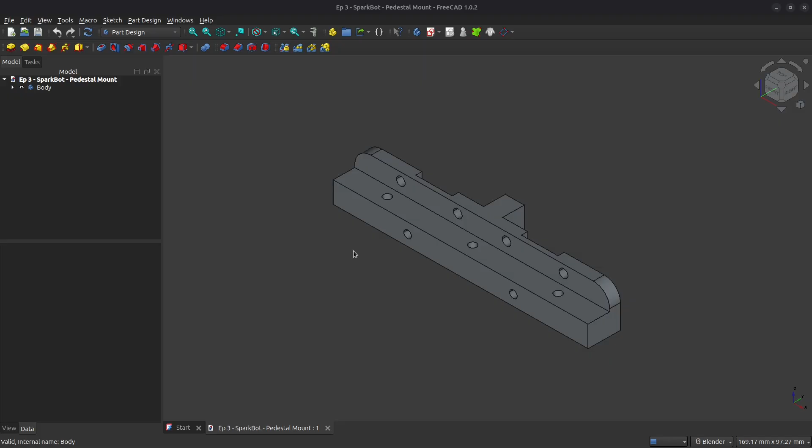With our mobility base and accessory deck locked in, it's time to tackle our odometry and our structural load paths. In this episode, we're engineering the pedestal mount. This pedestal is designed to rigidly secure our IR tachometers to track wheel rotation. This component also acts as a structural node. It anchors the vertical rail that will support the overhanging weight of our battery box. Design, engineer, deploy. Let's get into the CAD.

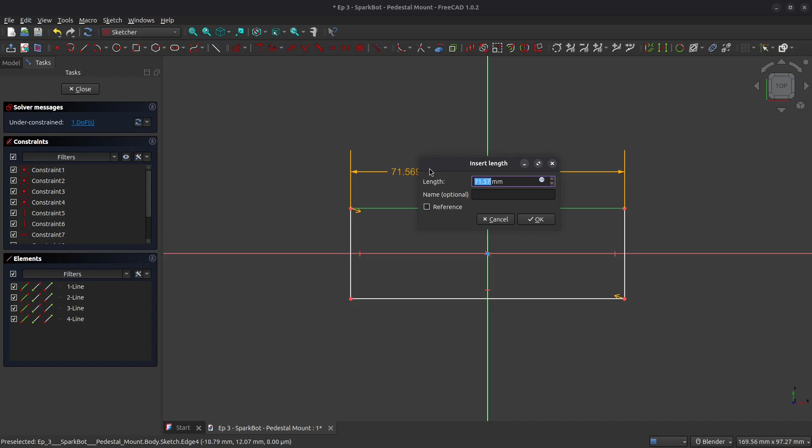Begin by creating a new body and a new sketch on the XY plane. We're going to grab the rectangle tool and create a rectangle that's symmetric around the origin. We're going to set the length of this to 94 millimeters and its vertical length is going to be 12 millimeters. Now we need 3 holes that we'll use for mounting this pedestal to our mobility base.

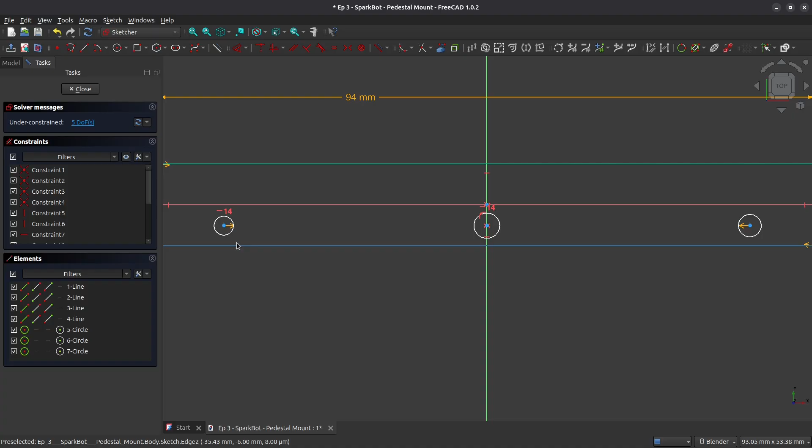So we want to make sure that we're really careful and not let the edge of these holes touch the x-axis because FreeCAD will try to constrain it there as a tangent. We're going to make sure that these 2 outer holes are symmetric around the y-axis, and then make sure that these holes are also collinear with that central hole. All right, so let's set the diameter of all 3 of these holes so that they're equal, and then we will set the overall diameter to the minor diameter of our PT screws, which is 2.8 millimeters.

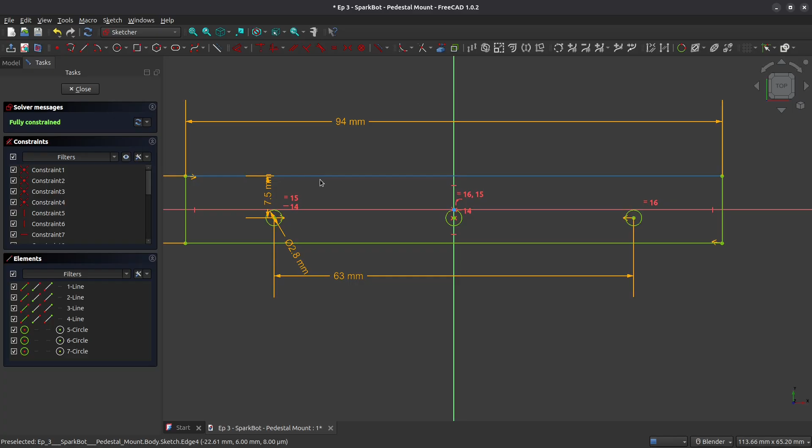Okay, so let's set the distance between these 2 outer holes. That's going to be 63 millimeters, and we're going to create an offset from the top of our rectangle of 7.5 millimeters. All right, with that, our shape is fully constrained and we can close out of this. And we're going to pad this out to 8 millimeters.

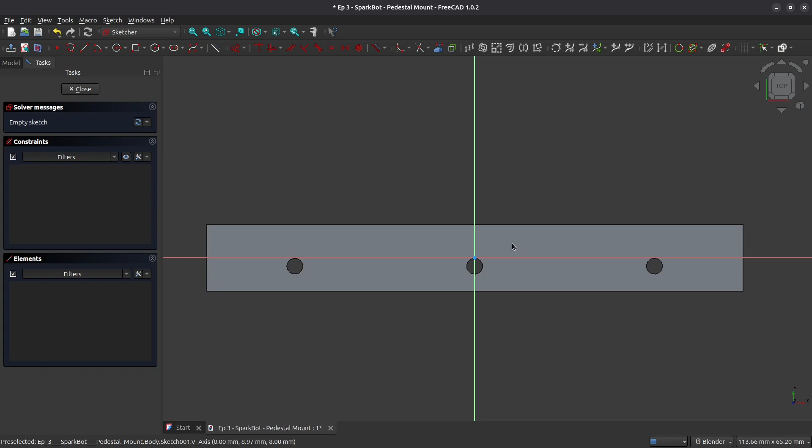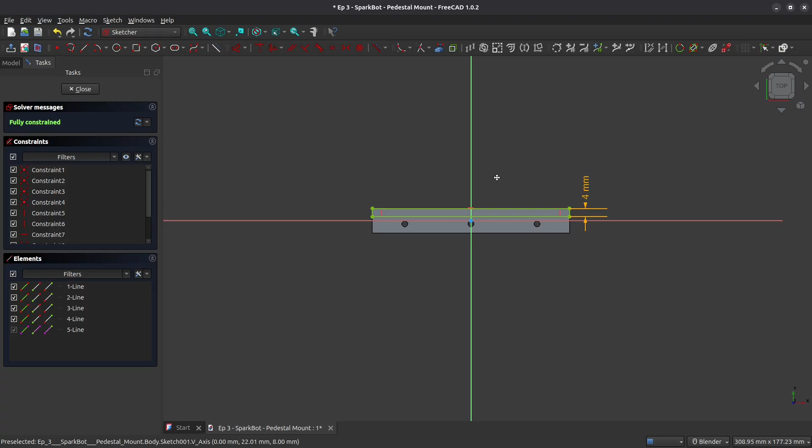All right, we need to create a shoulder on the top of this block. It will be used for securing the IR tachometers. So we're just going to reference the top edge of this block, and using the rectangle tool, we'll create a rectangle. We need to make sure that the edge is coincident in both corners, and we'll set the width of this shoulder feature to 4 millimeters. So with that, our shape is fully constrained. We can close that, and we're going to pad this out to 7 millimeters.

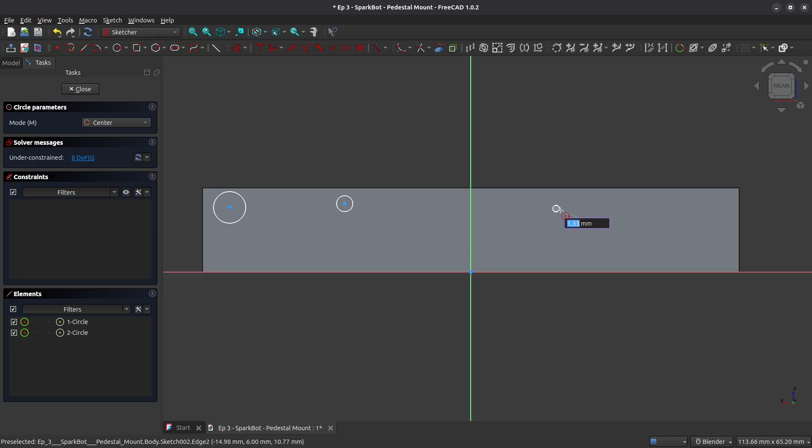Now that we've got that done, we're going to look at the back of this shape and add 2 sets of holes. These will hold the IR tachometers onto our pedestal mount. So create 4 holes, and make sure that the outer 2 holes are symmetric around the y-axis. The inner 2 holes will be symmetric around the y-axis, and then we'll make sure that these 2 sets of holes are collinear with each other, so they should move as a set. Let's make sure that the diameters of all 4 of these holes are equal. And we will set the diameter to 3.2 millimeters.

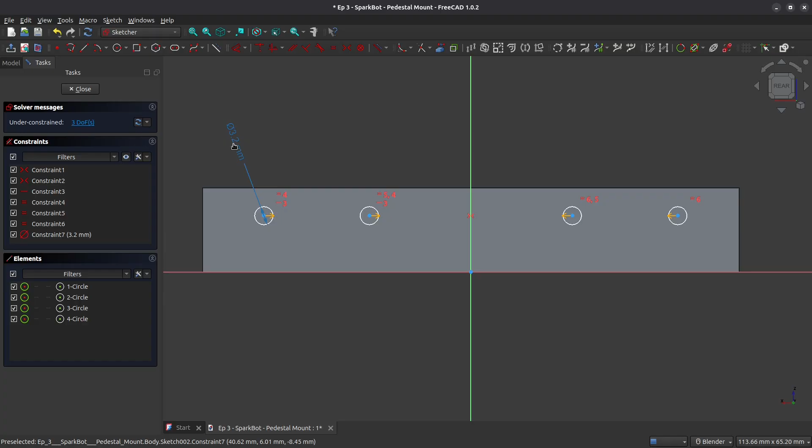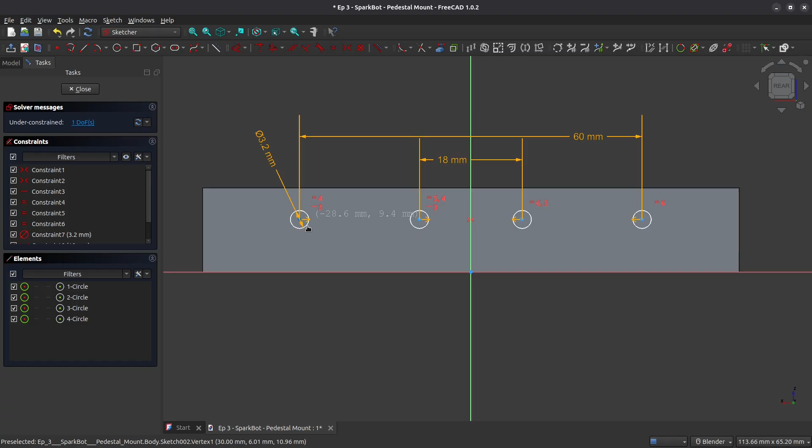We're using 3 millimeter bolts to hold the tachometers onto the pedestal, so we need to leave a little bit of room to have some clearance for those bolts. All right, so let's set the distance between these 2 inside holes to 18 millimeters, and the distance between the 2 outside holes to 60 millimeters. So there's our holes. The last thing we need to do is set their location in relation to the top of our pedestal here. So let's set that distance to 3 millimeters.

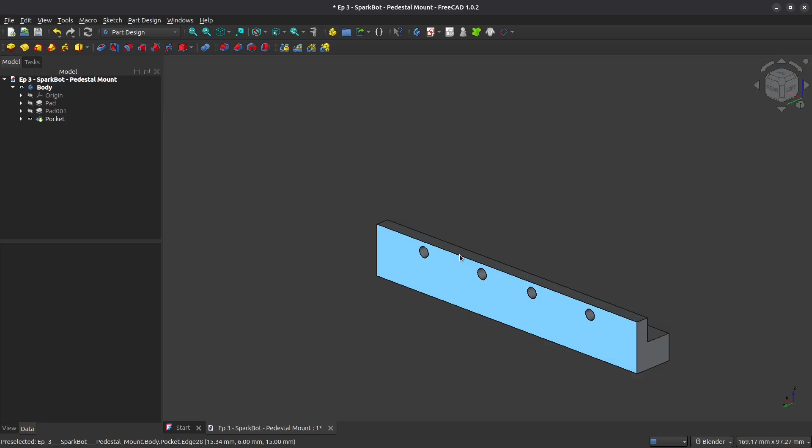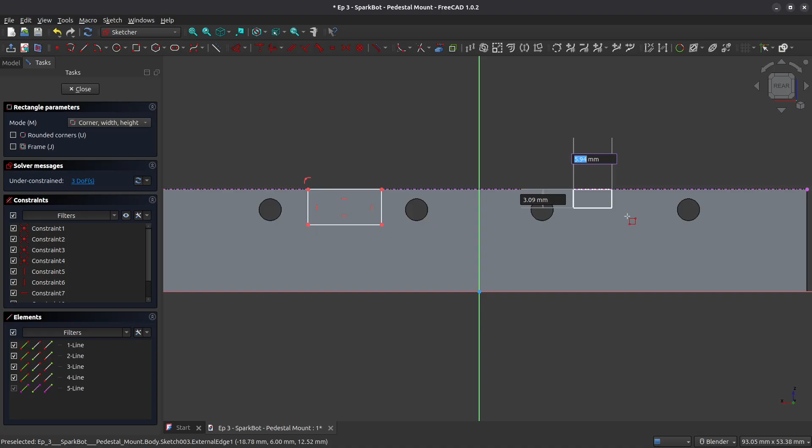And now we can see that our holes are fully constrained, and we can close out of the Sketcher workbench, and we're going to pocket those through. And 5 is greater than the 4 millimeter thickness of our shoulder, so we're good. And now we're going to create some clearance pockets on the back of our pedestal mount. The IR tachometers have through-hole components, and the ends of the pins protrude past the back of the circuit board. So we have to clear away some of the material here in order to not put tension on the circuit board of the IR tachometers when they're being secured.

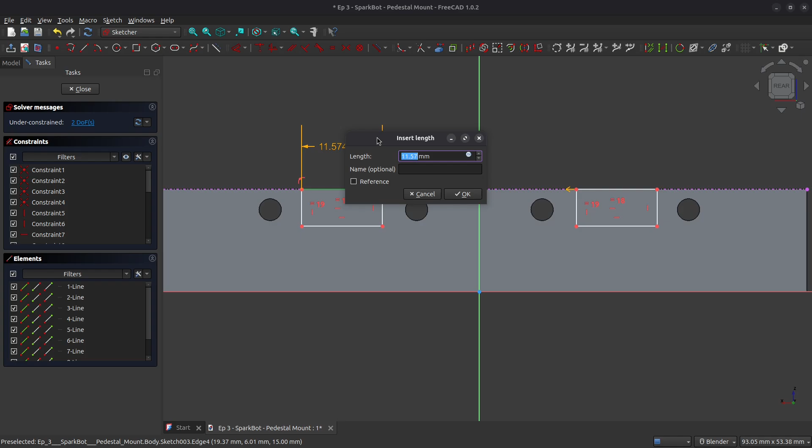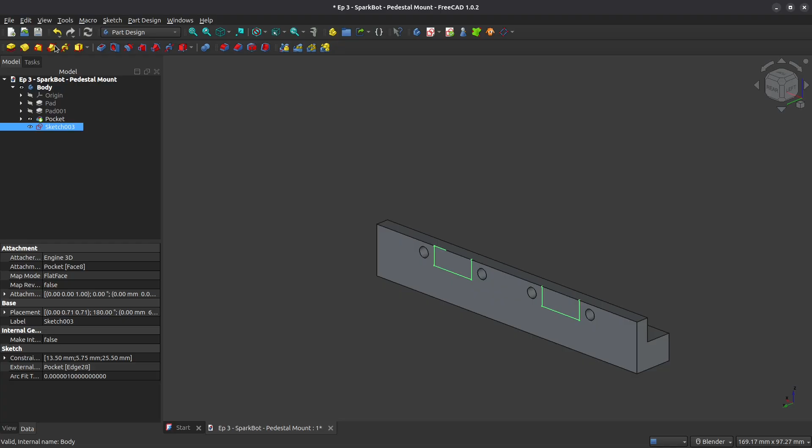So let's set the horizontal length of both pockets so they're equal. We'll do the same thing with the vertical length, and make it so that these are symmetric with respect to the y-axis. So let's set their horizontal length to 13.5 millimeters. Their vertical length is 5.75 millimeters. And let's set the distance between them to 25.5 millimeters. All right, so with that, those clearance pockets are fully constrained, and we're going to set the pocket depth to 2.3 millimeters.

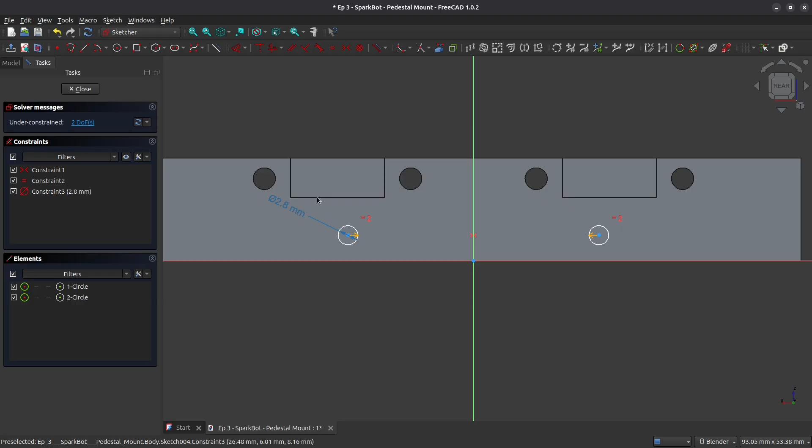Next, we're going to add 2 mounting holes to this pedestal mount. This is where the vertical rail that we construct in the next episode will be connected. And this vertical rail will support the overhanging battery box. As before, we need to make sure the diameters of both of these holes are identical. And we're going to set these to the minor diameter of the PT screws. That's how we're going to secure the vertical frame rail to the pedestal mount.

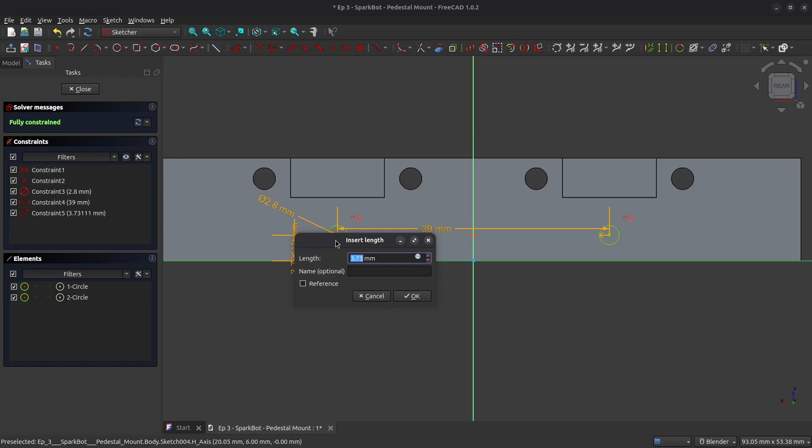And let's set the distance between these holes to 39 millimeters. And we're going to set their offset from the bottom of the pedestal at 4 millimeters. All right, so those holes are fully constrained, so we can close out of the Sketcher workbench, and we're going to pocket those all the way through. That's a 12 millimeter thickness, so 12 millimeters, we'll pocket them all the way through.

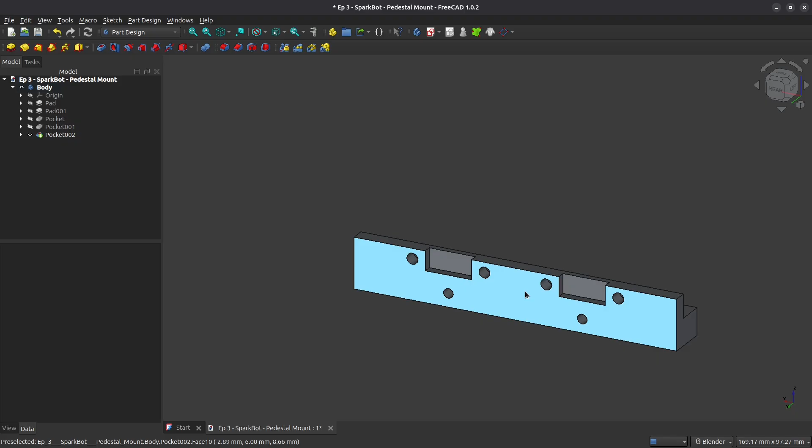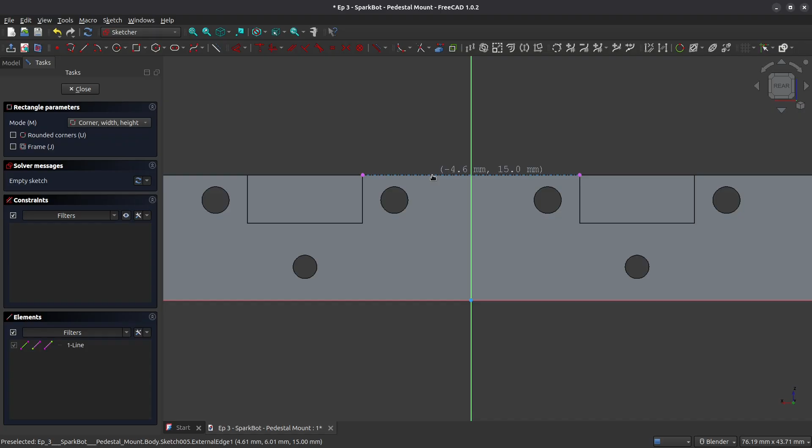Now, the last thing we need to do is add a feature onto the pedestal mount. It's a deflection buttress, and what it'll do is eliminate deflection in the mobility base between the pedestal mount and the accessory deck that we created in the last episode. So we're going to make this symmetric around the y-axis, and we'll set its thickness to 7 millimeters. So there we are. That's fully constrained. We can close out of that, and we're going to pad this out to 8 millimeters.

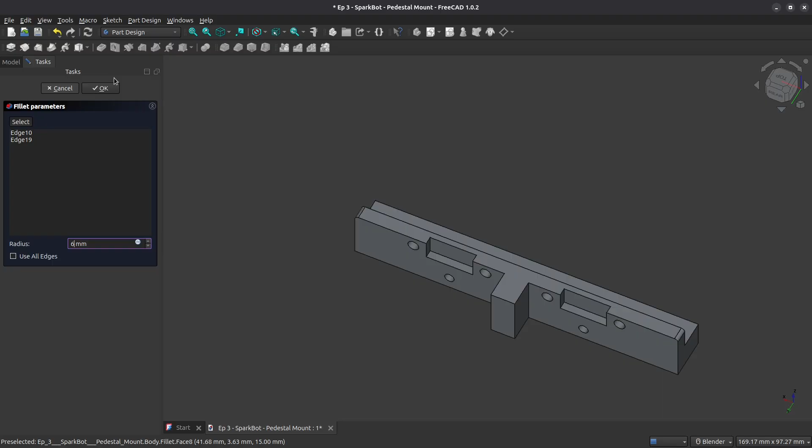And the last thing we're going to do is add some decorative fillets. It removes a small amount of plastic from the edge, but also gets rid of some sharp corners on this part. So 6 millimeters is fine. Let's close out of that. And with that, we have completed the pedestal mount. We now have a stable foundation for our odometry sensors, and a rigid structural anchor point ready to take the load of our battery module.

In the next video, we will engineer the vertical frame rail. We're pulling inspiration from the vertical frame rails created for the TitanBot fleet, and this will help to manage the overhanging load of the battery.